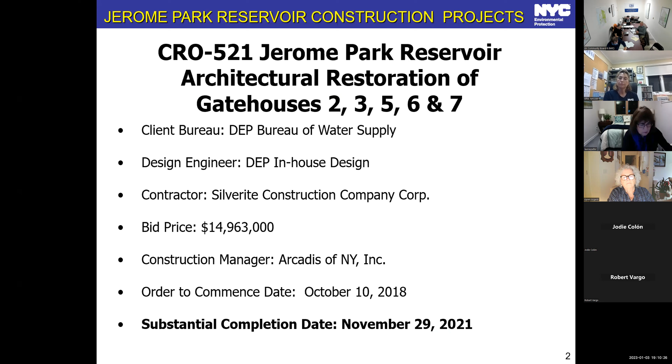That project entailed the deconstruction of gatehouses 2, 3, and 6, and the construction of canopy walls at gatehouses 2 and 3 that took their place. We removed the existing 10-foot-high chain link fence on the west and south sides of the reservoir, clearing and grubbing along the reservoir wall perimeter and all the existing growth intertwined into the chain link fence. We also installed a new concrete fence footing and a 4-foot-high fall protection fence, the black fence you see, around the reservoir, plus a vehicle guide rail along the roadway for safety purposes.

Then we did some architectural restoration of gatehouses 5 and 7, and put a new roof on gatehouse 7. Currently we're finishing up the permanent security upgrades of gatehouses 2, 3, 5, and 7.

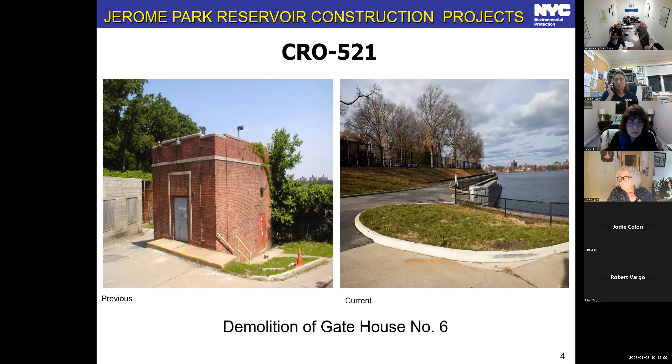Gatehouse 3, similar to gatehouse 2. I went ahead and deconstructed the superstructure of gatehouse 3 and then constructed this canopy wall as a representation of gatehouse 3.

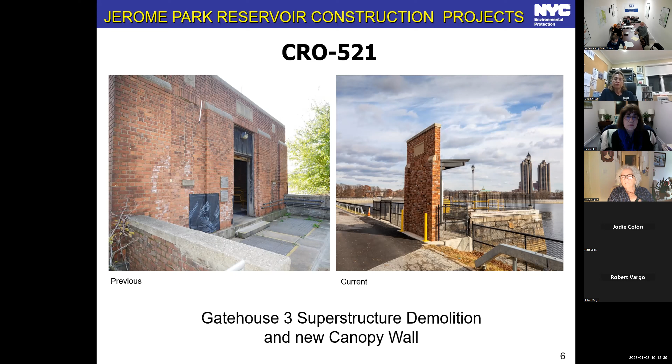The existing conditions before we did construction of contract 521: you see the 10 foot high fence on the right, on the left hand side here with growth intertwined in between it, and then the new guide rail, fall protection fence, and the grass area between the roadway and the fall protection fence.

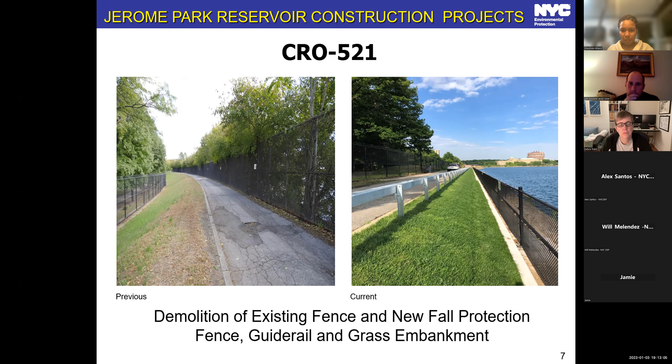The current project undergoing right now is another project to restore the Jerome Park Reservoir and rehabilitate the aqueduct. It's a contract that was bid by Triumph Construction Company for $37,594,000. We're the contract construction manager for the project. The order to commence date was May 17th, 2021, and the substantial completion date is currently December 29th, 2026, according to the contract schedule. The design engineer was DEP in-house design, similar to the contract 521 project.

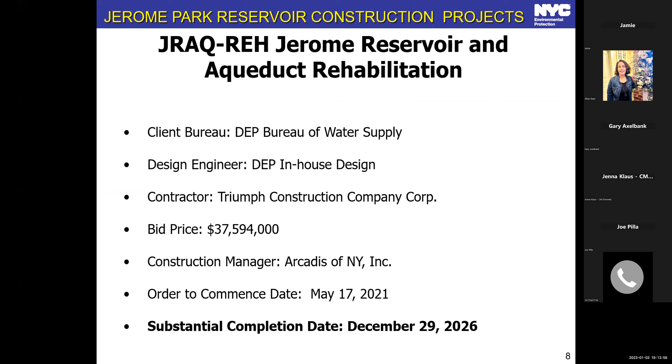This project entails repair of the North Basin ramp and installation of a vehicle guide rail, North and South Basin east wall repointing and refurbishing - that's the dimension stones above the water line, above the rubble wall portion of the wall. It also includes abandonment and securing of the old Croton Aqueduct between Gatehouse 7 and Gatehouse 6, filling it with flowable fill to secure and strengthen that aqueduct and the wall. And, similar to 521, removal of the existing 10 foot high fence and construction of a new 4 foot high fence, along with installation of guide rail along the roadway between gatehouses 6 and 7.

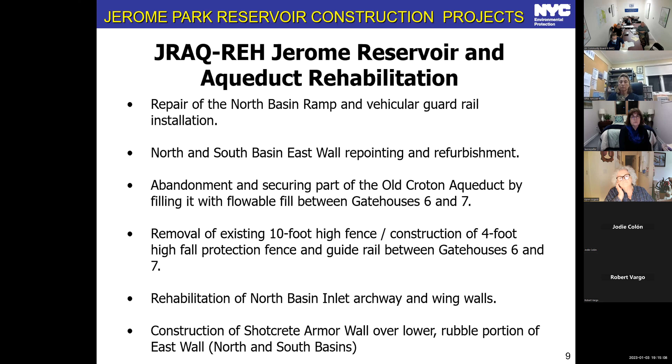We're also going to rehabilitate the North Basin inlet archway and wing walls with shotcrete to strengthen them and restore them to their former condition, and construct a shotcrete armor wall over the lower rubble portion of the east wall in both the North and South Basins. There's also work to rehabilitate the Lehman College retaining wall, primarily along the South Basin, and paving of the reservoir perimeter roadways, which will include replacement of any broken curbs.

There's also another contract coming up, CRO-590, which is going to rehabilitate the sluice gates internal to gatehouses 5 and 7, with new gate controls, installation of new mechanical screens in Gatehouse 5, and also a new bridge crane in Gatehouse 5. All that work will be done internal to gatehouses 5 and 7.

The project constraints for the JRAQ contract right now are that one basin needs to be empty at a time in order to perform the work as far as construction of the armor wall on the rubble portion of the east wall, the north basin ramp work, restoration of the capstones, and installation of a new 4-foot high fence and guide rail along the east wall. One basin needs to be in service at all times to provide city water supply during construction.

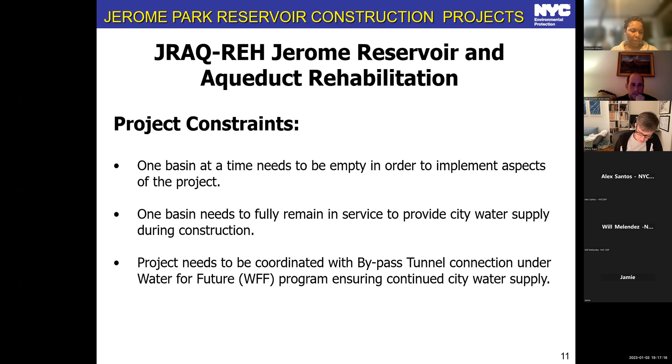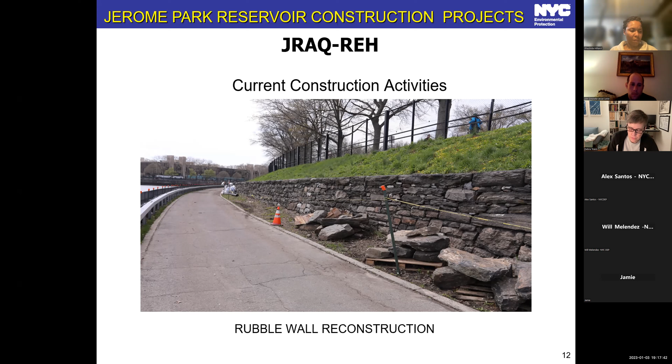Some current construction activities: we've completed this work, which is the rubble wall on the south side of the reservoir. You see the new stones being installed and relayed. We've pretty much deconstructed the wall and then reconstructed it again to increase its stability and aesthetic value for the reservoir.

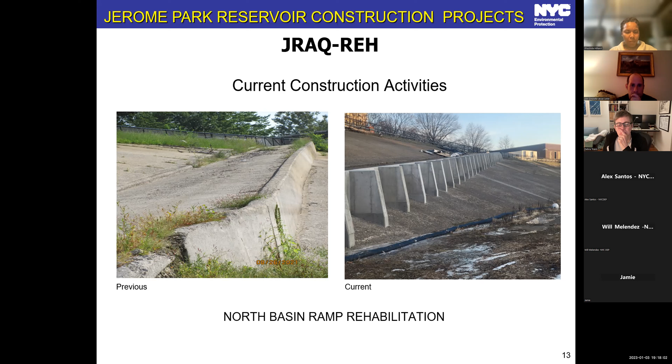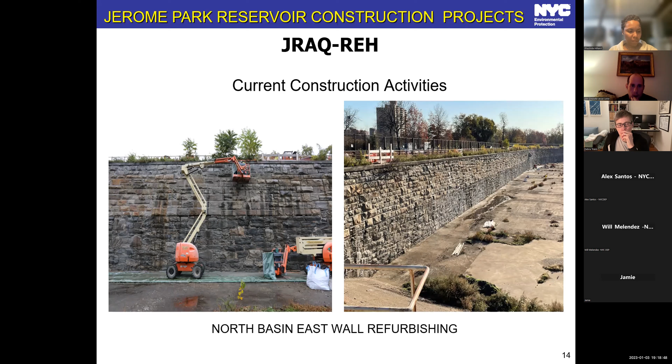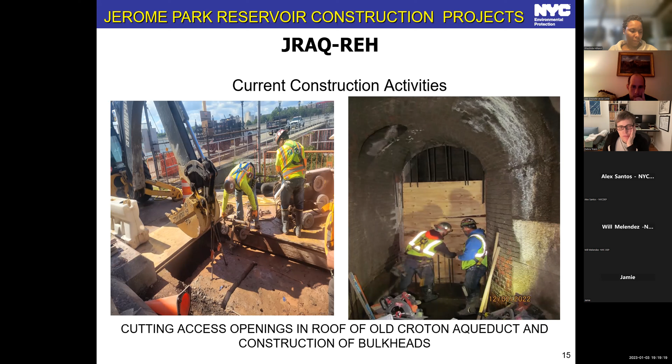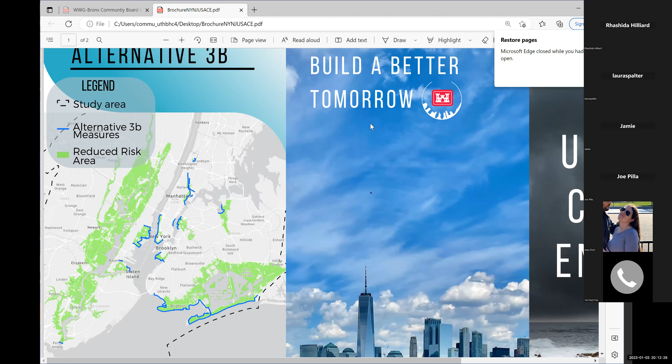What I want to say, Karen, is that this is clearly a very, very long-term project—they are just at the beginning of all of this. So I wonder how many community boards along these areas are thinking as far as you and we do. Manhattan's is okay, good. It would be nice to check on what they are doing—maybe it's a priority. Let me stop this.

So I will now switch to what we have on the table as far as action, right? And I will open this.

When we started, we were the only community board talking about this, but since then, the Army Corps has been appearing at community board committee meetings in Manhattan and Queens, because the borough presidents from those counties requested that they attend. We could maybe invite them for February, but we haven't got that from on high yet. We asked the BP and she didn't answer, or said no. I mean, we're a little bit far from the immediate adjacent area, right?

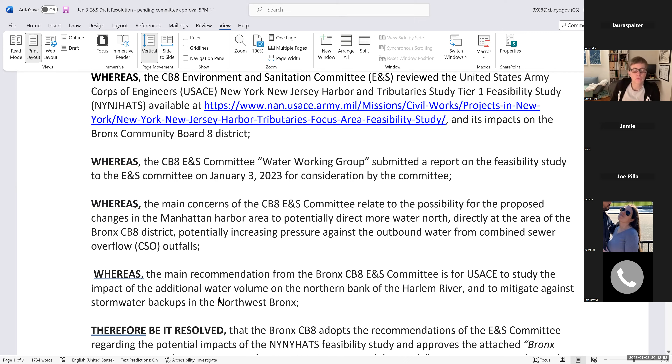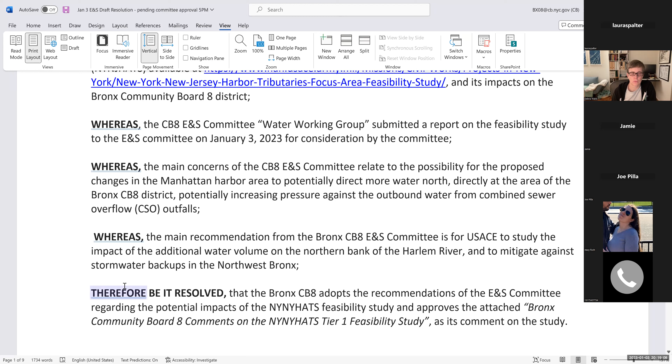Whereas the main recommendation from the Bronx CB8 E&S Committee is for the U.S. Army Corps of Engineers to study the impact of the additional water volume on the northern bank of the Harlem River and to mitigate against stormwater backups in the Northwest Bronx.

Therefore, be it resolved that the Bronx CB8 adopts the recommendations of the E&S Committee regarding the potential impacts of the NYNYHATS feasibility study, and approves the title of the document as its comment on the study.

Now I'm reading this, and on the therefore be it resolved, maybe we can just go with approves the attached. You see what I'm saying? Maybe cut this, adopts. I mean, they don't need to adopt, they just need to approve for us to submit, whatever you think. But this is the resolution.

Open to board members, feel free to raise hands, unmute, or I don't know. I just unmute directly because I leave the text on the screen so I can't see if you raise hands. But board committee members, please speak. Yes, that's fine, take it out. Take it out, thank you Karen. Agree, agree. Here, approves the attached as its comment on the study.

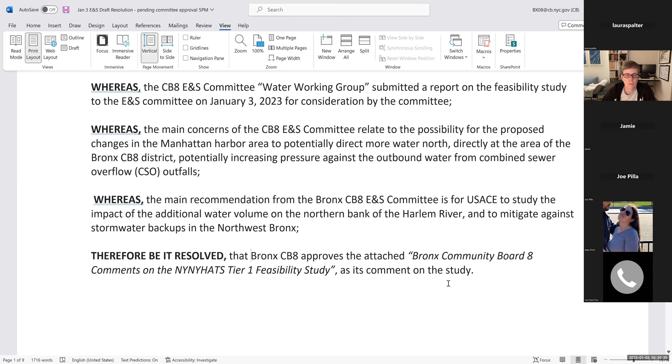So take out the 'the' in front of Bronx CB8, that Bronx CB8 there as its comment on the study. Yeah, I made it as short as possible while giving credit where credit is due, as per Laura's advice. Okay, excellent, okay, good job.

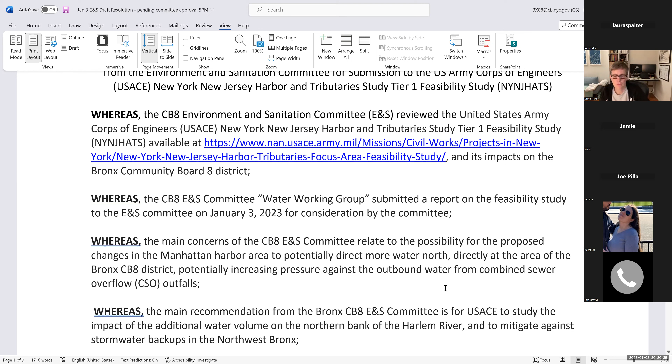Are people on, from, maybe that should be a capital first letter, where? From here at the very top, just underneath the heading. No, from here? Okay, perfect. I don't think you need 'from', I think you just need 'Environmental Sanitation'. Yeah, that's right, yeah, just that's it. Environmental Sanitation Committee, for submission to the US? Yeah, okay okay.

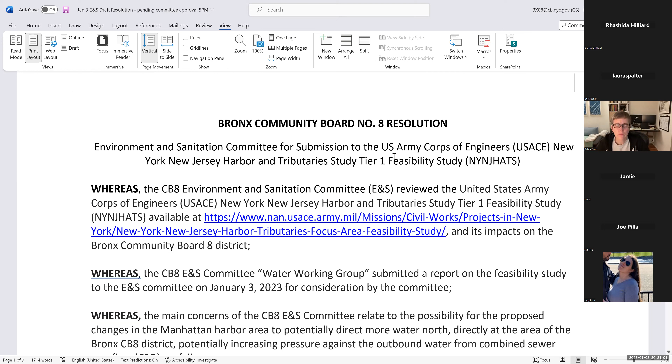Camelia, where the third 'whereas' says the main concern relates to the possibility for the proposed, I think it's 'of the proposed changes'. Correct, excellent. Yes, thank you. In the Manhattan Harbor area to, I think you can get rid of 'potentially' since we're talking about just the possibility. So it can just be 'to direct', correct. More water north. And then, because you're using 'direct', you can get rid of 'directly'. So it's just 'targeting', you wanna say targeting? Targeting the area of the.

Focusing, maybe? Focusing, okay, on the area of, and potentially which would cause, hold on, focusing on the area of the Bronx. You can just say 'focusing on Bronx CB8 district', not 'area of'. Okay, or just maybe 'impacting' or 'directly impacting', yeah, on Bronx CB8 district. Sorry, then where are you?

So whereas the, we said 'impacting the CB8 district'. I think 'impacting' is more direct, like is affecting us, impacting is more direct, yeah. Impacting Bronx Community District, Community Board 8 district, and then potentially increasing pressure against the outbound water from the combined sewer overflow outfalls, and simultaneously increasing the pressure from the river onto the land. There's just going to be more volume of water, hold on.

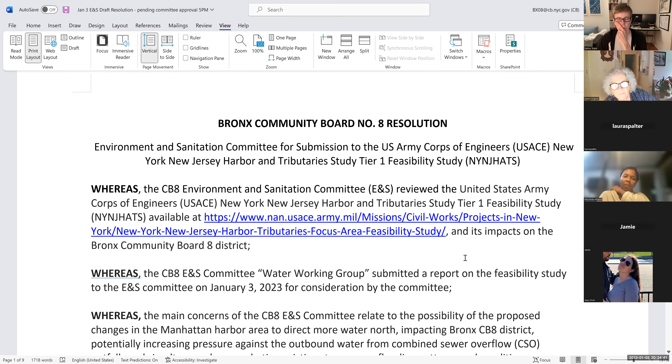Spuyten Duyvil is in the storm surge zone, the highest level zone. It is the most likely to flood. We have a zone, whatever it's called, 1A, it's the most prone to flooding. I think it's covered in the study. But we wouldn't want to single out Spuyten Duyvil versus Broadway versus Marble Hill versus Harlem, so I think we're good with the generic language.

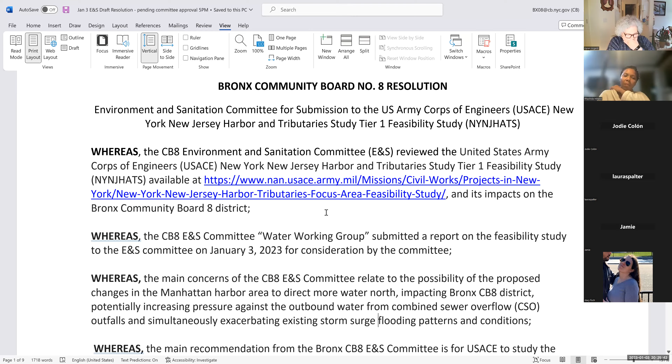If anybody wants any changes, remember the actual full board meeting is next Tuesday. So if there's any wording change or edits you want, please let me know, because I'm sending this for exec tomorrow. We reserve the right until Friday this week to make changes, but for the full board we have to send what we send. So we're not going to get a chance to comment or make changes in the report submitted that is attached.

Right, so we should take our time now and read through it, make sure we're okay with what's being said. Bob, can I comment? I would like to, Jodie, do what you suggest, Camelia. Could I just finish my comment that everybody seemed to skip over and I didn't get to finish?

No, it's not on the committee, I can't see the report, but it was circulated with all the documents, on the website, circulated end of December. I'm saying I didn't see it, but I wanted to make sure my point about the flooding zones in Spuyten Duyvil is that, what I saw on that map you showed, it's directing the water onto Metro North property.

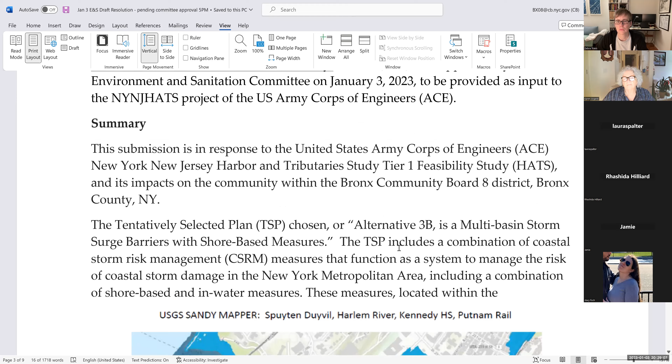A summary, I thought to put: this is in response to the Army Corps of Engineers' plan and its impacts on the community board district. The tentative plan selected, 3B, is this. It includes a combination of a variety of measures, blah blah blah.

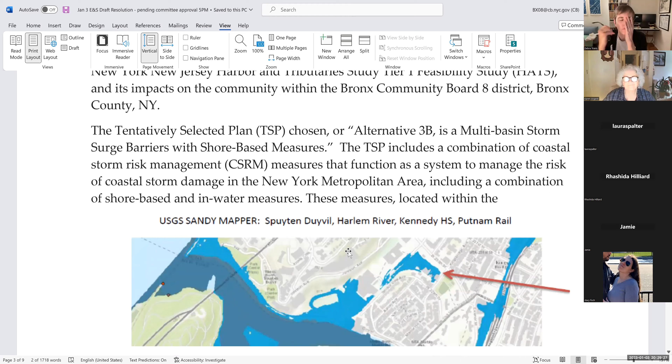And here's the map that relates to us. I see, for example, here a start of a sentence. I think I will move on the next page. But it addresses these areas. And again, I highlighted this because this is our main point: it appears to potentially neglect important low-lying areas of the Bronx, a major part of which is home to many low-income and historically disadvantaged residents.

And this is kind of the conclusion of the summary, right? This is text from Karen: despite the assertion that the TSP measures include complementary induced flooding mitigation features and risk reduction features, as well as non-structural measures and natural and nature-based features -- this is what I told you, the other options considered, this is what they were considered to exactly combat the risks that we are speaking about -- the Bronx CB8 finds these to likely be insufficient.

Moreover, the study is insufficiently taking -- see, I could put this, is insufficiently taking into account. You should say the study does not sufficiently take into account. Okay, does not. Yeah, that makes it sufficient. I had the study fails to take a watershed approach.

But it's too, in my view, Karen, it's too strong to say that it fails. It's partially taking account, not sufficiently, as to our observations. Why don't you say 'does not sufficiently adopt a watershed approach'? Because sometimes it's too strong. It's better if they hear it straight up. So, not sufficiently adopting, is what you're saying? Not sufficiently adopt.

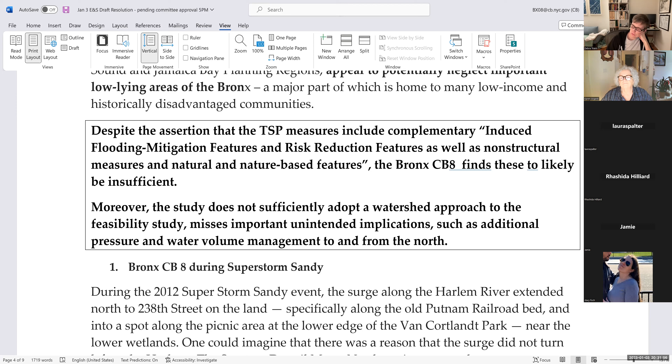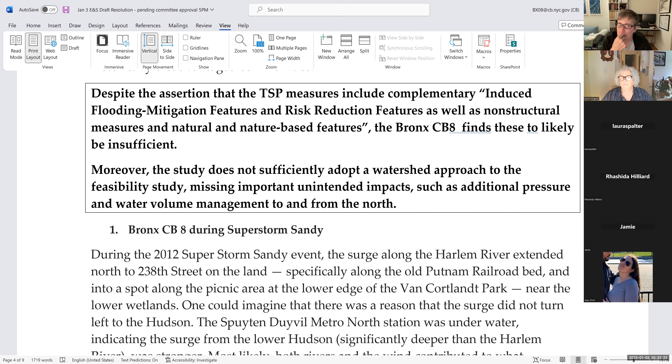Let's keep going through, because we are half an hour in and still have like 5 pages. I say: missing important unintended impacts. Bob, to answer your question about whether they adopt a watershed approach -- they adopt more of a storm surge approach. Correct, exactly. Because the Bronx is the only actual mainland part of this collection of islands, they're really looking at this from an island point of view and not from a mainland shore point. Correct, like we do.

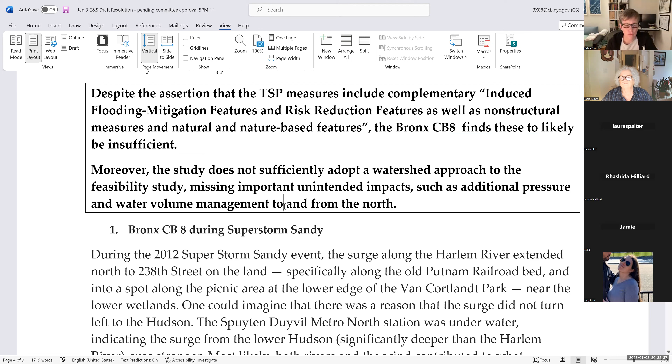She's correct entirely. Okay, such as additional pressure and water volume management to and from -- is this a 2 and a comma, 2? No, it's fine. Okay, good.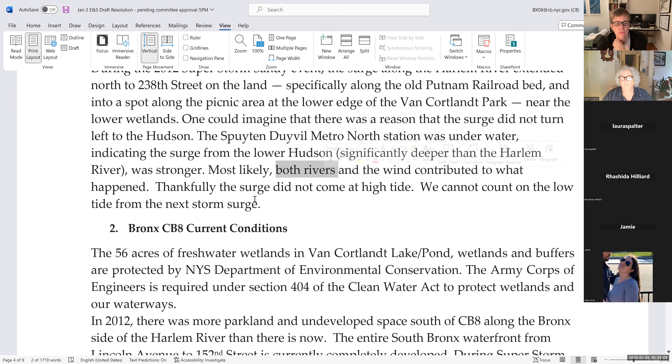Okay, so this is background: CB8 during Superstorm Sandy. Karen told them what happened, and the Spuyten Duyvil Metro North Station here, Jodie -- this is explicitly referred for you. And Karen said that both rivers and the wind contributed to what happened. Thankfully, the surge didn't come at high tide. We cannot count on the low tide for the next storm surge, correct?

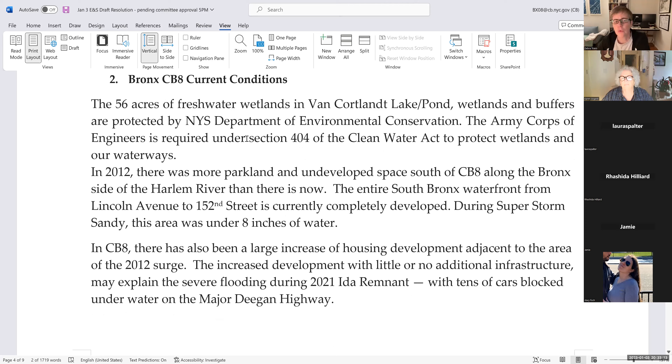So just to stop there, I don't believe that's accurate. I think that there was a high tide during Sandy at approximately 8 p.m. It didn't come to our area at high tide. The Harlem River didn't get high tide. That's not necessary -- I'm cutting this. It will end in: most likely both rivers and the wind contributed to what happened. Shall I cut?

I don't know. We were not under high tide when Sandy came. I was in Manhattan at the time, and the Hudson River most certainly had a high tide during Hurricane Sandy. But when the surge came up the Harlem River in our area, it wasn't high tide. I think the high tide was on the east side. Okay guys, if there's debate, let's just stick with a generic description we all agree on, if you wouldn't mind.

So there's a lot of variables? Let me read the last sentence. You don't have to be forensic here. Exactly. Spuyten Duyvil Metro North Station was underwater, indicating the... may I make a suggestion? Significantly deeper than the Harlem River was stronger. Can I cut this? Most likely both rivers and the wind contributed to what happened.

Thankfully the surge did not come. We cannot count on the low tide. Can I cut this? You're supposed to document what happened, so do you want me to leave it? Just tell me what to do. Let's rephrase this - I have no idea about the tidal periods 12 years ago.

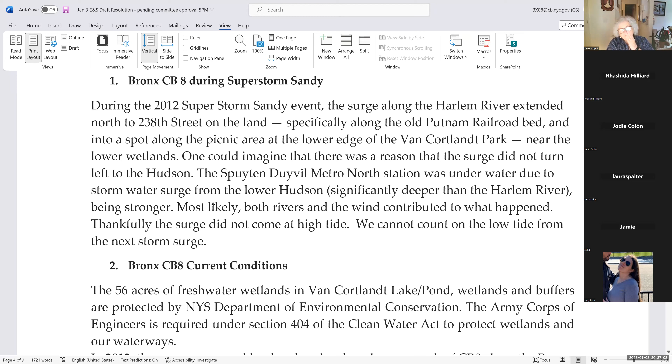Yeah, okay, if somebody can reproduce this in one sentence, fine - if not, I'm leaving this. I think you should remove the part about the high tide, though. Me too. Okay, I'm doing this and leaving the sentence there.

Oh come on, okay good. Oh did I remove that too? Oh god, sorry guys, sorry. Where's the undo on this thing? No, that's right, that was right. Okay good, okay good - current conditions.

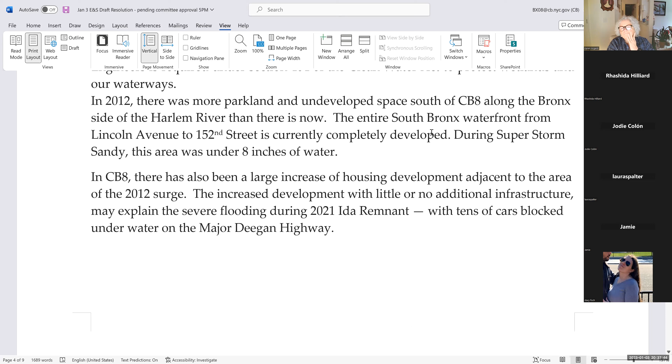Terry is describing here our current conditions. She points out that it used to be more parkland back in the day before they started developing, which is a great point. And, not necessarily causation but correlation with the development, superstorm Sandy saw 8 inches of water.

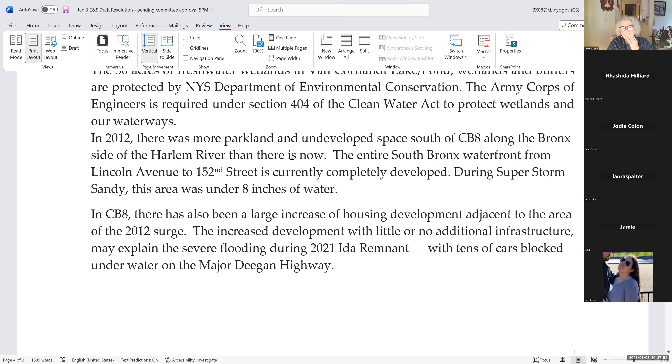I think we should use the word permeable and impermeable, because that's really what we're talking about - the undeveloped permeable space south of Community Board 8. And now it's impermeable, concrete and blacktop and whatever. There was more parkland and undeveloped permeable space south of CB8 along the Bronx side of the Harlem River, which now became impermeable - it's currently completely developed and impermeable.

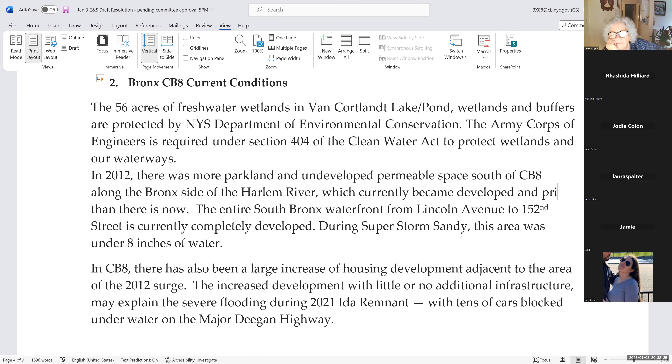Became primarily impermeable, which subsequently became... which has subsequently been developed with impervious surfaces. Impervious surfaces, yeah, which has subsequently been developed with impervious surfaces. Hold on, let me just read the whole thing and then we correct.

Okay, in 2012, there was more parkland and undeveloped permeable space south of CB8 along the Bronx side of the Harlem River, which currently became developed and primarily impervious. No, which has subsequently been developed - been developed, which became developed, which - no, has - no, been developed, and is now primarily impervious.

No, come on, oh my God. This keyboard is Wi-Fi, so you know.

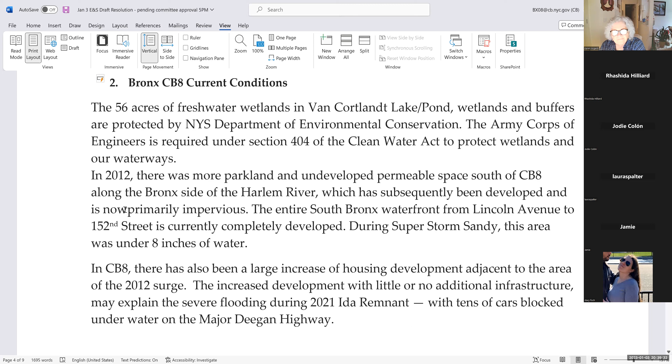Primarily impervious. The entire South Bronx is currently completely... I don't think there's nothing here. In CB8, there's also a large increase of housing.

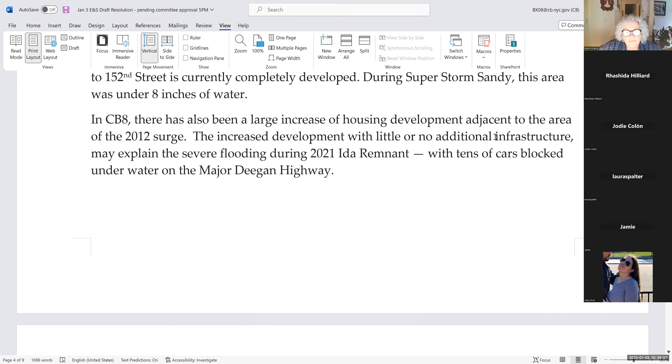Okay, yes, no infrastructure. Either it's no additional green infrastructure. Do you mean green infrastructure there, Karen? The increased development, little or no additional green infrastructure. I think we should leave it because she means also for drainage.

This is drainage. There's no drainage, right? I think it would be worth mentioning that this would cause an even greater impact to people living in the area than it did. Can you let me go with just current conditions, and then there's a whole analysis section.

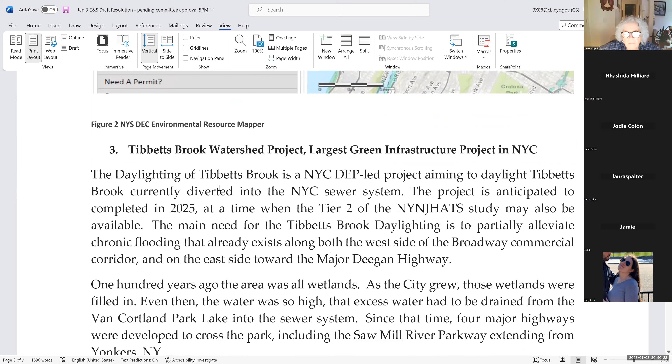This is the map. Connection to Tibbetts Brook Watershed Project as the largest green infrastructure. She's describing what the project is because probably they do not know, referring to the need to partially alleviate chronic flooding that already exists.

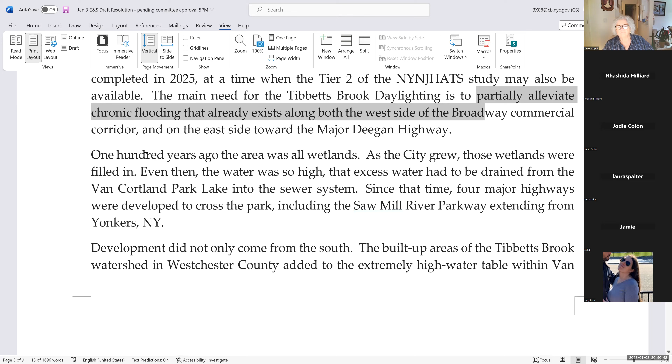She goes back to 100 years ago, the area was... I think this is useful, I think this is great. I think it should say that, including the Saw Mill, many highways are named after rivers.

You can end the sentence there. Which are all subject to extensive flooding risk. New sentence, just say all of them are subject to flooding, or flood prone, or vulnerable to dangerous flooding.

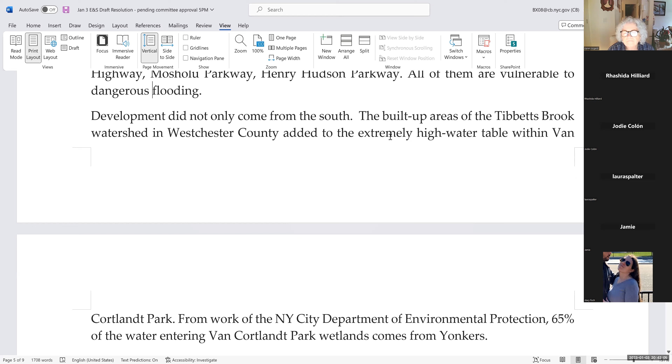Development did not only come from the south, Westchester County. 65 comes from Yonkers. Don't touch that, we know.

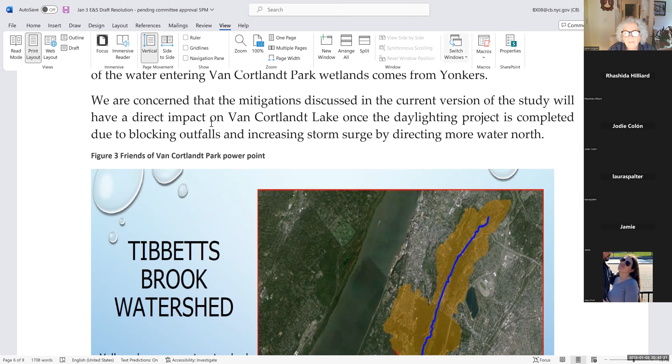We are concerned that the mitigation discussed in the current version of the study will have a direct impact on Van Cortlandt Lake once the daylighting project is completed. This is great - on that part, on the state protected freshwater lake, I think you should put that this is a DEC freshwater wetland, a protected freshwater wetland, Van Cortlandt Lake.

Isn't it mentioned before somewhere? No, put it here where you're talking about the impact, in that sentence where you say the current version of the study will have a direct impact on Van Cortlandt Lake - state protected freshwater, put it in brackets, that's fine. Yeah, protected, what did he call it? Protected freshwater wetland.

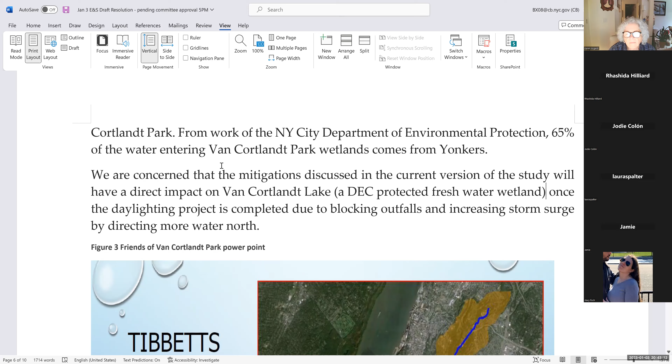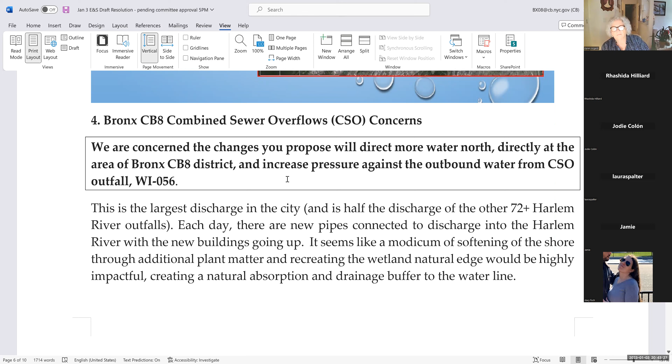Okay, once daylighted, okay good. Picture again our CSO concerns, so I thought it's important to make this simple and highlight it. We are concerned the changes you propose will direct more water north, directly in the area. This is what we put in the resolution, and increase pressure against the outbound water from CSO.

Karen, I don't know what this WI-056 is. Oh, that's the name of it. Leave it alone, don't touch it. This is another meeting, no worries, okay.

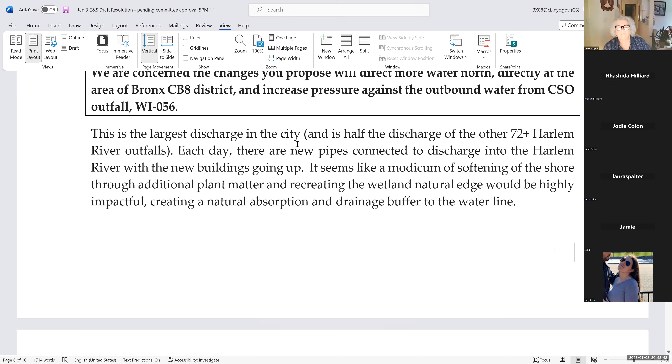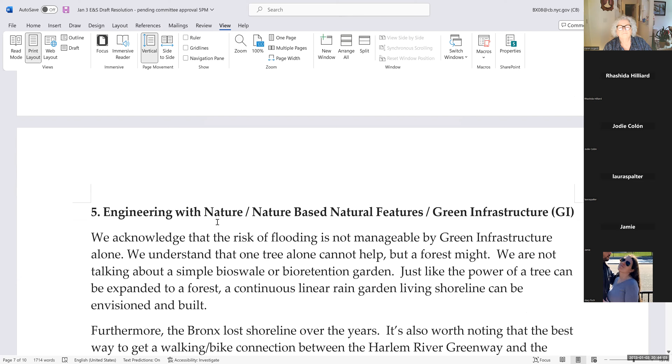Discharging the city is putting in new pipes, this is like advocacy, it's great. Softening the shoreline through additional plant matter - here she's switching into nature-based engineering with nature, which I made into a separate paragraph.

I like very much that it was so fairly put, that we acknowledge that the risk of flooding is not manageable by green infrastructure alone. Then she goes into explaining and giving a very nice example of a project where a shoreline was created with recreation space and all of that, at Pier 26. Then the main recommendation is for them to consider undertaking a study of the impact of the additional volume on the northern bank.

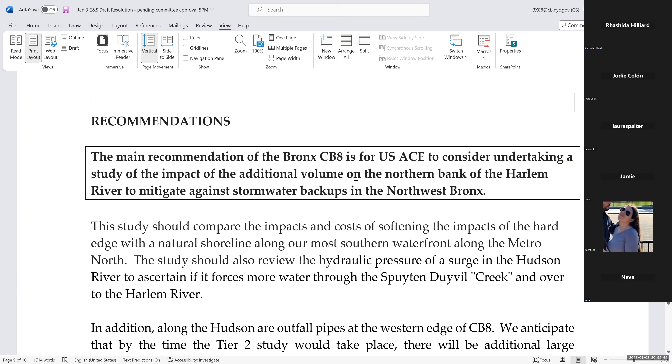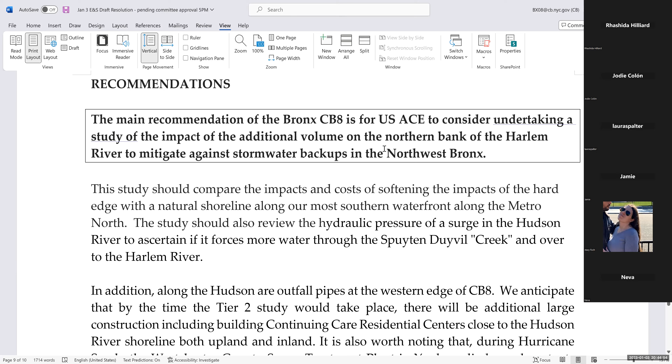I don't know, this sounds a little bit weird, huh? On the northern bank of the Harlem River, to mitigate against stormwater backups. What is the northern bank? I don't know, are you talking about Spuyten Duyvil, Laurel Hill? It's the North Bank as opposed to Manhattan Community Board 12.

Where it bends, because it's east and west until Spuyten Duyvil. The impact of the additional volume - I would say on communities north of the project zone.

Isn't that what you're saying? On communities, additional volume - aren't we north of the project zone? Aren't we part of the project zone though? No, we're not, we are neighbors, just outside of it. Yeah, that's the whole point here. We're not in the zone, like Laura said.

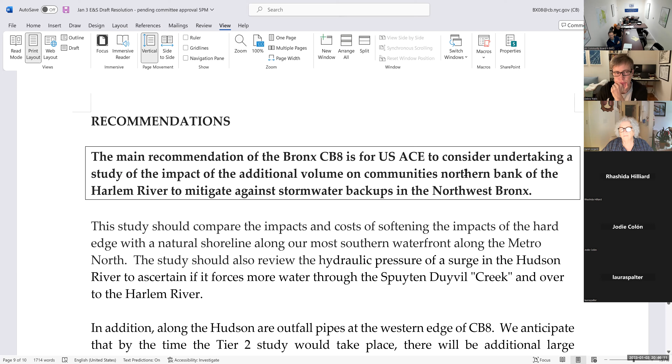Okay, so what do I change here, or do I leave it? Yeah, I think that's right, I think Bob's right then. Just call it 'communities north of the project zone.' Communities, hold on, because this one - okay. They ghosted us - no, they don't reach us, Laura. I said they ghosted us. To us, on communities, sorry Bob, just give us 'north of the project zone.'

And then to mitigate against - oh no, let's read it again. Let's say, study to consider, and I would just say mitigate against stormwater backups. Well, it's not just the stormwater backup, it's the storm surge and the impacts to the storm surge. I think you said that in the first clause. The recommendation of the Bronx CB8 is for USACE to consider undertaking a study of the impact of the additional water volume on communities north of the project zone, and mitigate against stormwater backups. I would just say 'and' - then it goes back to, okay good, and two things. You're asking them to do two things.

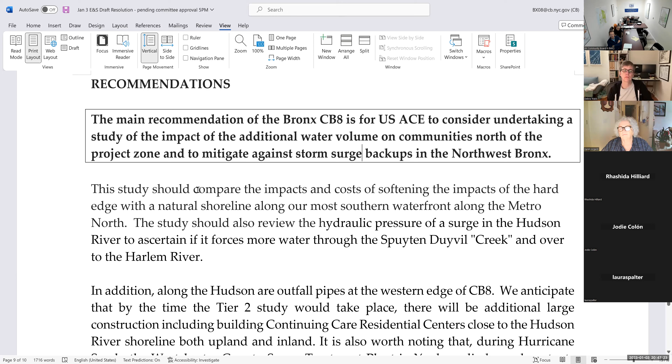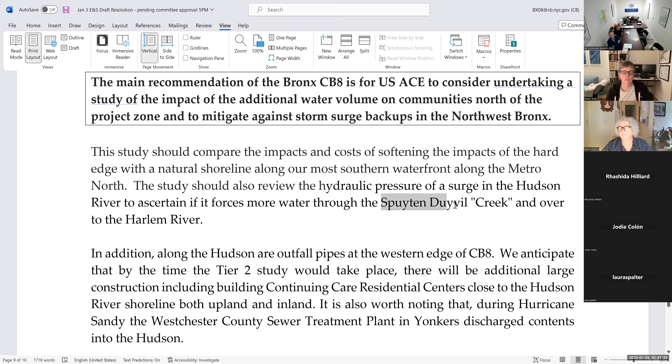Okay good, so then it goes into description of what we mean - storm surge backups in the northwest Bronx. That's fine, in general it's good. The study should compare the impacts and costs of softening, and should also review hydraulic pressure into the Spuyten Duyvil and over the Harlem River. In addition, along the Hudson are outfall pipes at the western edge - is this correct then?

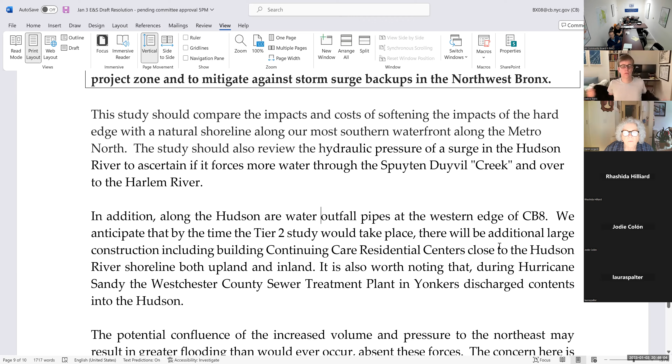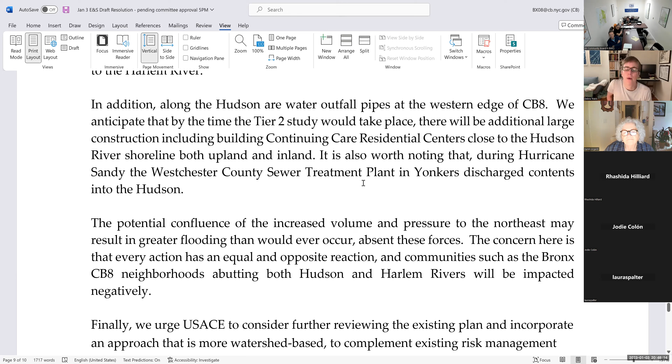But should we say water outfall pipes? Yeah, there are outfall pipes on the Hudson - Community Board discharges to the Hudson. We anticipated by the time tier 2 takes place there will be additional large construction, correct? Continuing care residential centers, yes, it's also worth noting - something like that. I wouldn't put water outfall pipes though, maybe DEP outfall pipes. Sewer, storm, and stormwater - they're CSO, right? CSO, there you go.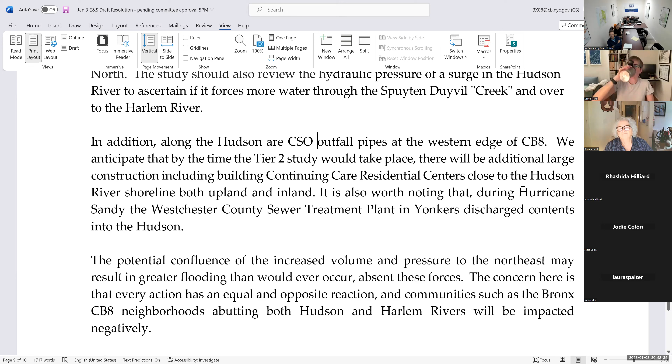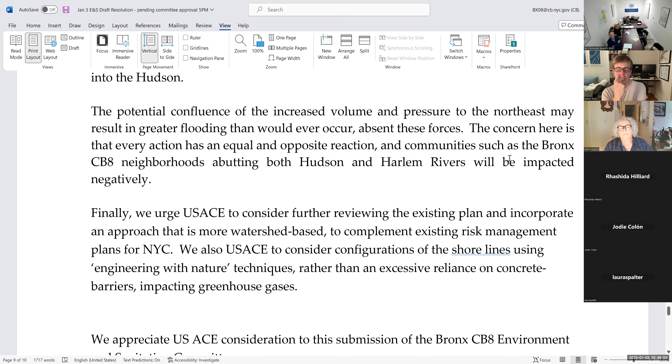Also worth noting that during Sandy, the Westchester sewer treatment plant discharged contents into the Hudson. Potential confluence of the increased volume and pressure may result in greater flooding. The concern is that every action has an equal and opposite reaction, and communities such as Bronx CB8 neighborhoods along both Hudson and Harlem will be impacted negatively. Finally, we urge them to consider further reviewing the existing plan and incorporate an approach that is more watershed-based to complement existing risk management plan for New York City. I'd say not to complement, but somehow to build into or be embedded into existing risk management - are you good with this?

I don't want to change it if you're good with it. We also ask USACE to consider configurations of the shorelines - say 'shoreline configurations,' shoreline is one word. Using engineering with nature techniques.

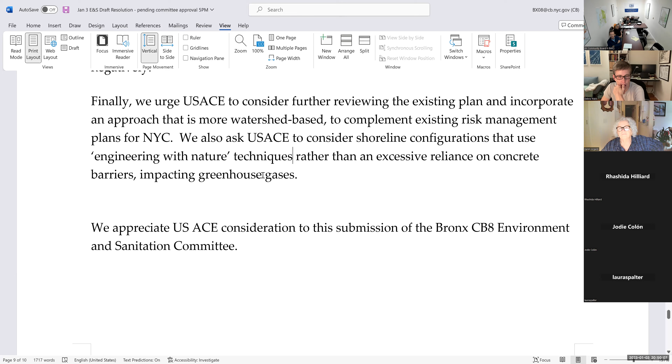We are almost there, folks. They use engineering with nature rather than excessive reliance on concrete barriers. Why is this fine here? You don't need a comma after 'techniques' - take it out. Impacting greenhouse gases, we appreciate that. Done, 8:50, let's save.

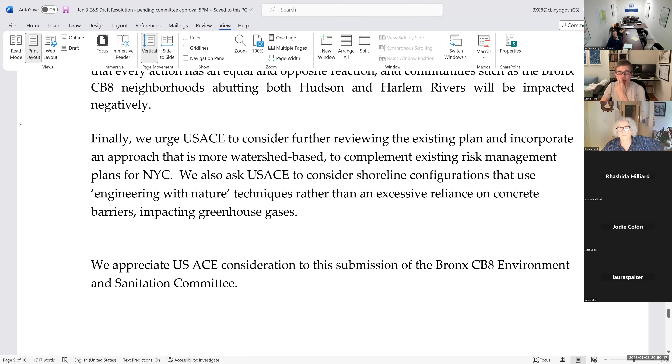Where it said Major Deegan, it's usually called Major Deegan Expressway, not Highway. We go back and have to revisit the first debate about Hudson versus Harlem. Let's save - don't worry, I'll press save again just for you, Laura.

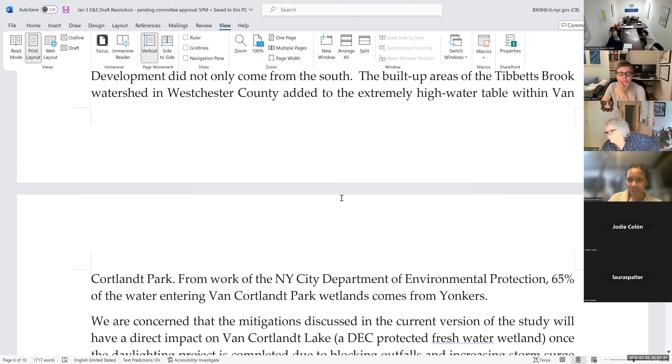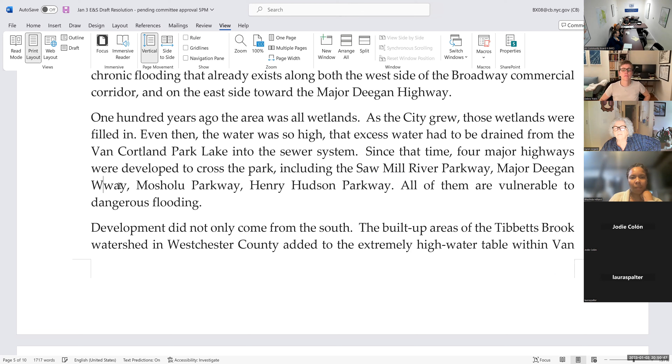We're gonna return to - wait, what did you make it say, Major Deegan, not Highway? Major Deegan Expressway, just Expressway. Thank you, Bob. They all have adopted our stream beds, which is amazing. Okay good, yes, go to the first page.

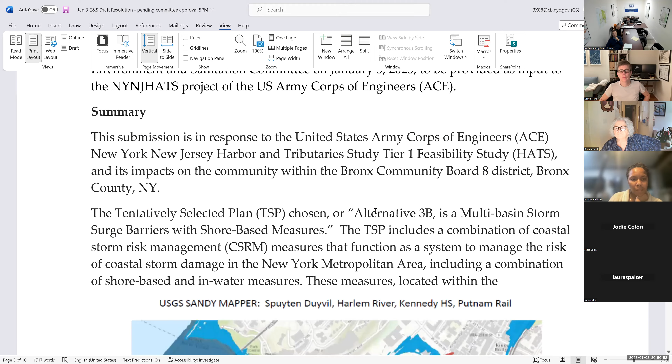We're characterizing the cause of the storm, and we wanted to make sure that in that paragraph we didn't - okay, stop. Jodie, let's get this right, we don't want to take the Harlem River off the table here. The Spuyten Duyvil Metro North station was underwater due to stormwater surge from the lower Hudson, which is significantly - is that the way it should be?

What do you want, Jodie? I'm sorry, I'm eating. What this says is basically that whatever they do in the Harlem River has no effect on us, because we flooded because of the Hudson. So I just think it should say it was underwater due to storm surge, period, or from both the Harlem and Hudson River.

I would personally just end it as storm surge, period. But if you want to specify which rivers, let them figure it out. All right, I agree with this. I think Karen's speculating because their study is meant to impact those waterways farther south. Those are the waterways they're working with.

So what Karen is saying is that the Metro North station was impacted by the Hudson, not by the Harlem. Is this what you were trying to say, Karen? No, it indicates that the surge from the lower Hudson, which is many times deeper than the Harlem River, was stronger because the water didn't go and make the turn. The water went north.

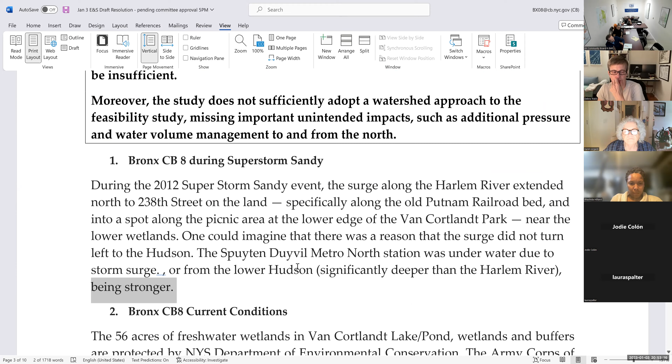We know what she says. Here's the picture. Let's rephrase. So if it came from the Hudson north and flooded Spuyten-Duyvil because it couldn't make the turn, then the same water from the Harlem River could come north also. I'm saying the two of them acted together and they both made it worse.

Right, but this sentence doesn't sound like they acted together. That's my point. This end part, because it's disconnected, doesn't sound like they acted together. No, that's all I'm saying.

Okay, let's wrap this up. Karen, I want to give you the final word on this, and whatever you say as a sentence, we'll state it here. Please read to me what you want. We looked to the Spuyten-Duyvil Metro North Station, which was underwater, indicating the surge from the lower Hudson, which is many times...

Indicating the surge from the lower Hudson, significantly deeper than the Harlem River. Many times deeper, I'm not sure that's quite correct, but significantly deeper works. Okay, significantly deeper is good, significantly deeper than the Harlem River.

And then you say, being stronger. Is stronger, was stronger. We will read this again. The Spuyten-Duyvil Metro North Station was underwater, indicating the storm surge from the lower Hudson, significantly deeper than the Harlem River, is stronger. I would rephrase, that's kind of complicated. That's not right.

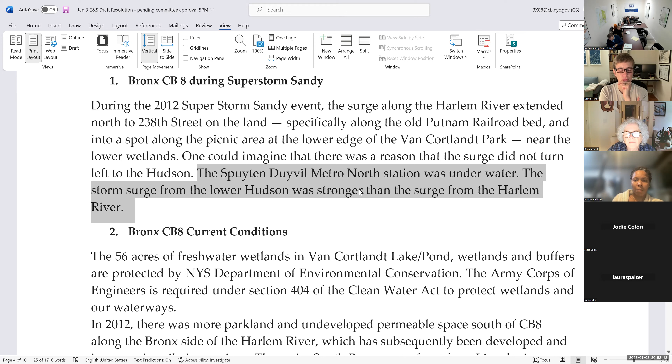Then we should say from the lower Hudson River. I will read this again, and if this makes sense, this is it. The Spuyten Duyvil Metro North Station was underwater. The storm surge from the lower Hudson River was stronger than the surge from the Harlem River.

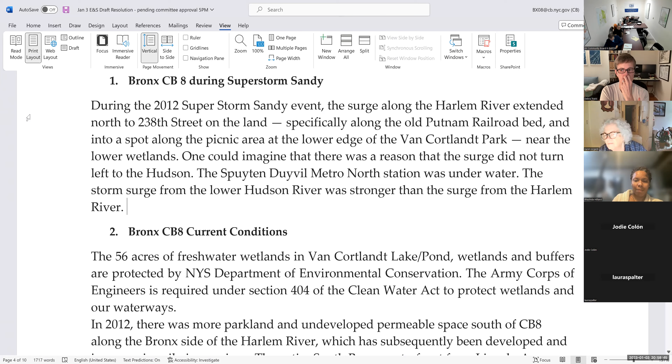It makes sense. I'm thanking infinitely Karen for her patience and wisdom that hopefully this document now encompasses, and thanking everybody for their English skills. Are we good? I think we're good.

I just want to make clear for the purpose of documenting today's work that Karen's original submission on behalf of the Water Working Group be entered along with the minutes, and that this be identified as modified by the committee as a whole for the purpose of submitting to the resolution. But Karen's original will be in the minutes.

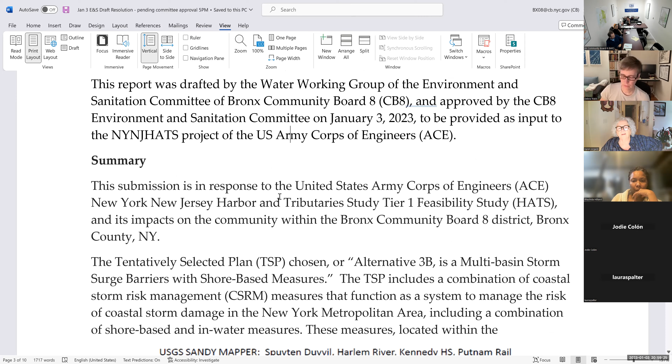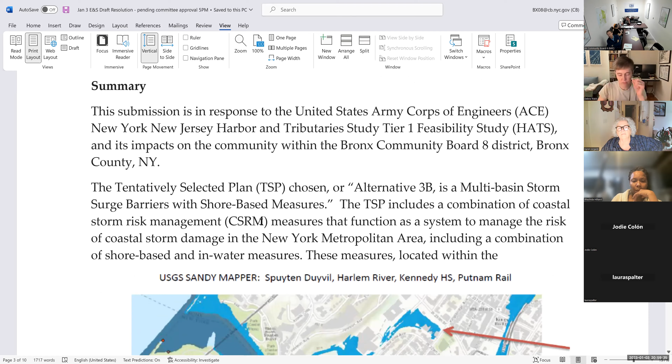And this submission, which is now the Environment and Sanitation Committee collaborative work, is being moved to the full board at 8:59 PM today. Let's just do a show of hands that we approve this version.